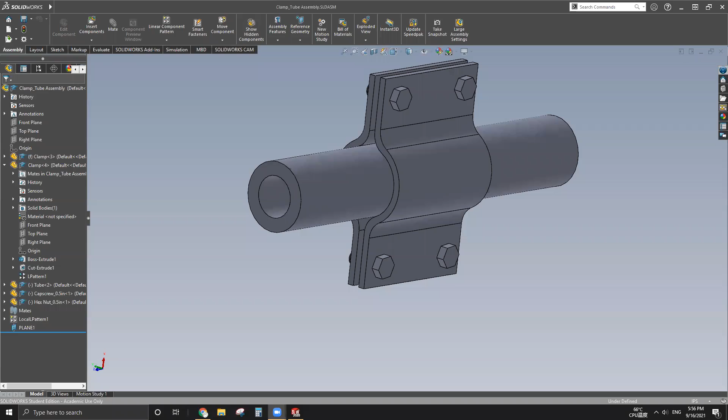Resume recording. So just jump three or four times, you can access this video. I strongly encourage you guys to watch this video and follow along, or just spend maybe 30 minutes before you go to bed and watch it. So that'll take you about 2 weeks. Then you have a pretty good idea and understanding of how to use this software.

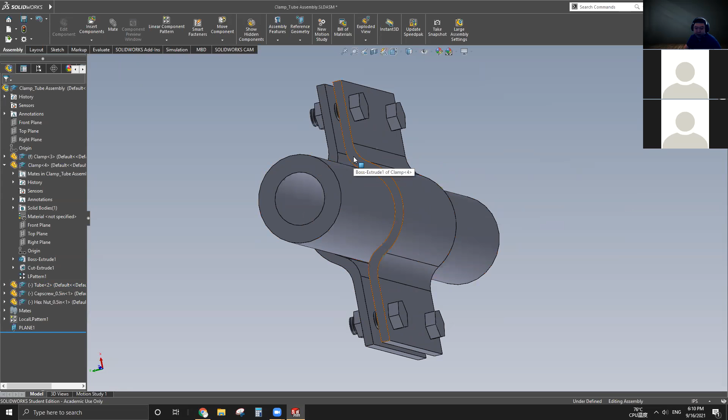All right. This is the assembly that I showed you guys last time. From week 1 to week 3, which is last week, we have been talking about parts. So pretty much we just talked about how to make a part, right? Very simple, straightforward, and that's why today I'm going to be introducing how to make an assembly. At least a simple assembly, not a very complicated top level assembly. So from here, you'll see how the parts are made, and different relationships will give you different effects. For now, this is rigid, right? But not fully rigid since it's a clamp. So it should be acting like a fixture that's clamping down on this pipe.

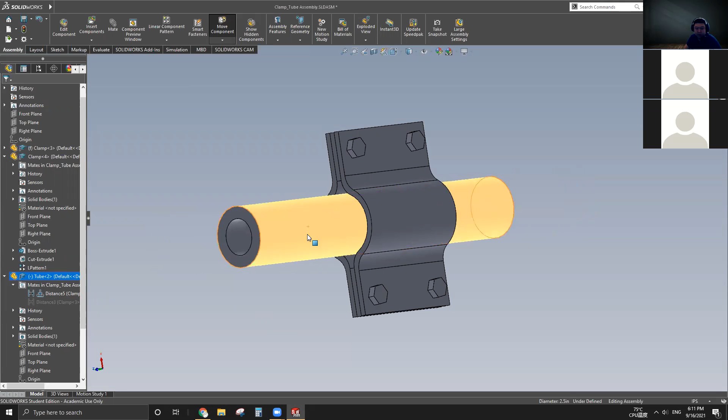So it's a little bit hard to see, but look at the edge of the pipe. If I move it, it rotates. So that's following the rule of physics, right? If you're not clamping down too hard, this totally can rotate within the groove and can be wobbling a little bit. And also, if we get rid of one of the relationships, this pipe can even be slipping. So sometimes when you build your model, it really depends how you set up the relationships, which right here we call mates, or constraints, that will give you different mobility or effect.

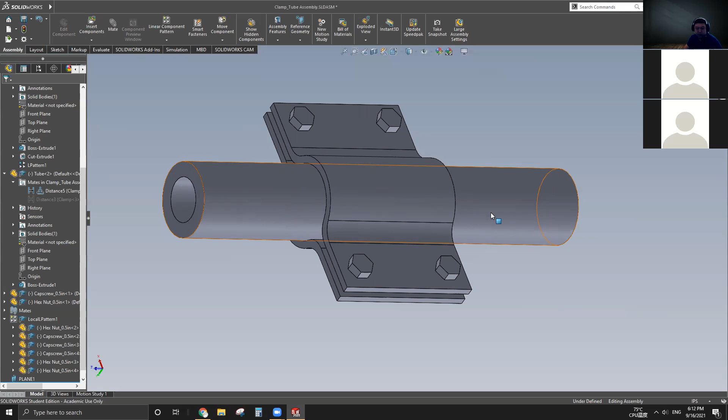And also these fasteners, in reality, can rotate, right? And they're totally able to be rotating. And since it bolts on with a nut, it cannot make any axial movement, as we modeled. So that means once you've done constructing the assembly, you can totally play with it and see what the limitation is and what the remaining room for designing is. Okay, any questions so far? If not, I'm gonna move to how to make this assembly.

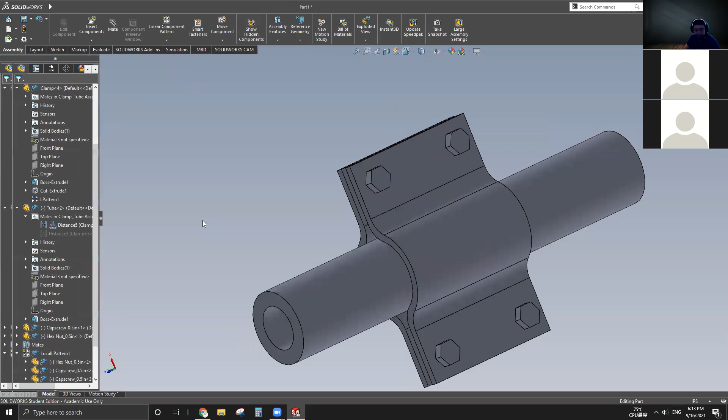All right, starting from scratch, we have nothing. And the first part I'm gonna make is the clamp. Before doing anything, I have set up two hotkeys, which I use many times on this computer. The first one is Normal To, because this is almost a must-have during sketching. And the second one, under Evaluate, is Measure. This is how you measure, get your dimension or distance from the other model to set up your current WIP part.

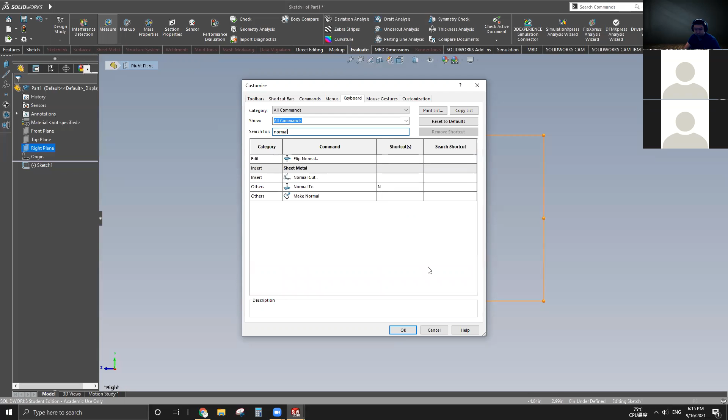So you can hover over, don't click anything, right click, and there's Customize. Just customize right here in the keyboard. You search for the feature or the function you like. So first thing is Measure. I set it to the number 1 on my keyboard, and the other is Normal To. I set it as N because N represents normal, right? So just FYI, you don't have to do this. To me, it just saves maybe 2 seconds of clicking multiple times.

All right, so pick a plane and let's make the clamp. If you don't know where to start or anything stops you, it's always good to make 2 center lines. Those are construction lines and will never hurt you, and you can get rid of them anytime.

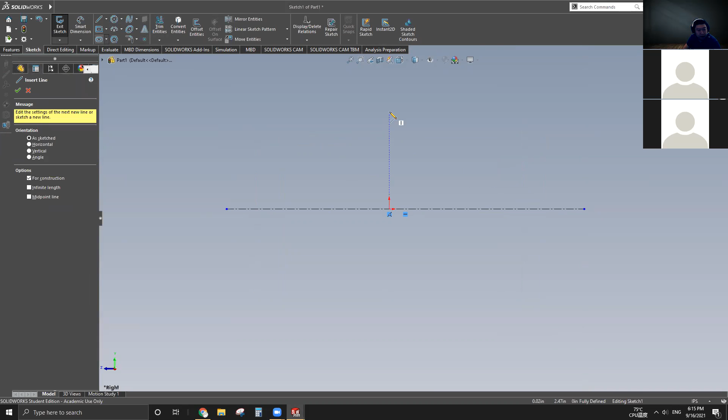So once we have 2 construction lines and a good coordinate system, a great question for this time: from the last 2 weeks, every part I started building always started from the origin. Is this part, the clamp, gonna start from the origin as well? Do you think that's gonna be a good idea? No. I think it would be a better idea to put the center of the part, or the center of the 2D projection of the part, at the origin. Right. Well, yes, no, maybe. It really depends. Psychologically, if it was totally yes, I wouldn't be asking, right? But it's okay. I want to bring out the logic or your personal preference of modeling.

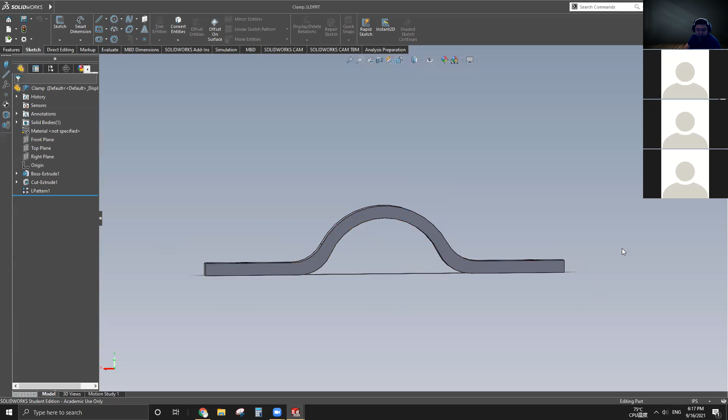So let's take a look at the assembly right here, and let's separate out the clamp by itself. If we're making a flat sheet first and somehow bend it, I'm not sure how well that will go. So starting from this side will definitely be harder than starting from this side, right? Because right now our tools are just revolve, extrude, and nothing else to add material. So once we have the profile from the side, we can draw it and just extrude it to form the entire shape. That'll be easier. From this side, you start drawing something and extrude it, and you need to think of how to make up the top part.

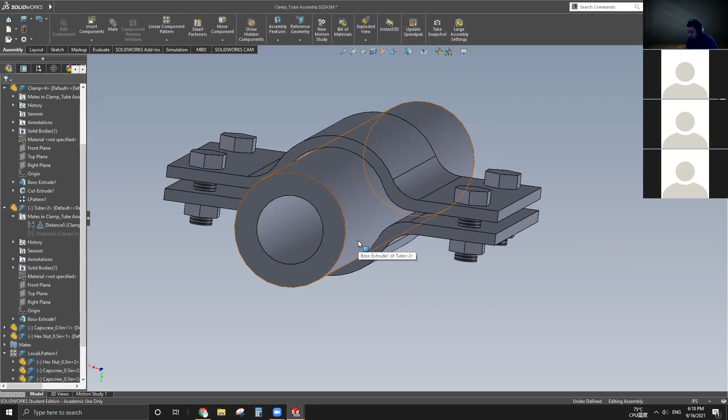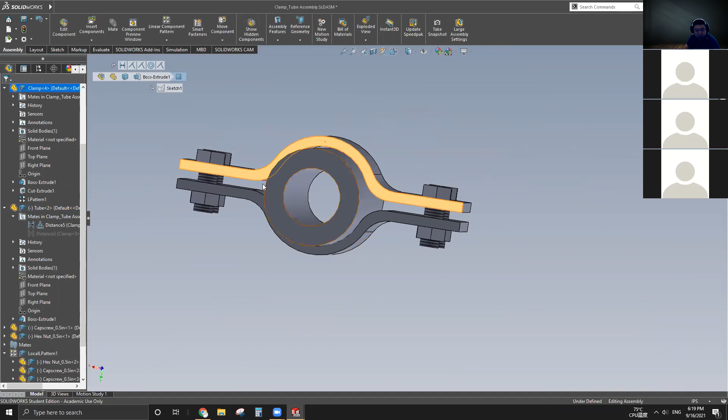So based on all those reasons, we know we'd better start from this view or this direction. And we have 2 clamps right here. It would be easier for us to start drawing the curvature by just drawing the pipe out on your new sketch, right? Because you can totally make this surface and that surface overlap. And this surface would just be an offset from this surface by whatever the thickness is. So that's why I'm saying it depends on your own logic and your modeling preference. You may not start modeling from the center.

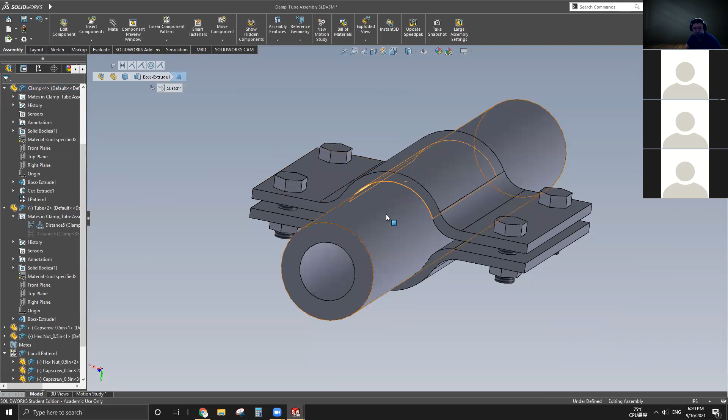So let's figure out what the outside diameter of the tube is. And right here it's 2.5. Let's do 2.5.

All right, so right now I have the pipe. Let's assume there's a pipe, and this outside diameter is the outside diameter of the pipe, which I'm gonna set as the inside diameter of the clamp. So from here, let's just imagine,

let me bring the rectangle tool, the center rectangle. We have one clamp right here, and we have another clamp right here. Well, I didn't make them perfectly identical, but just for you to visualize, and another semicircle or quarter circle on the top to give the thickness of the clamp, and also at the bottom.

So now we have the entire model's profile, and we just need to get rid of something that we don't want and define the remaining things that we do want. Then we can extrude from there. Okay.

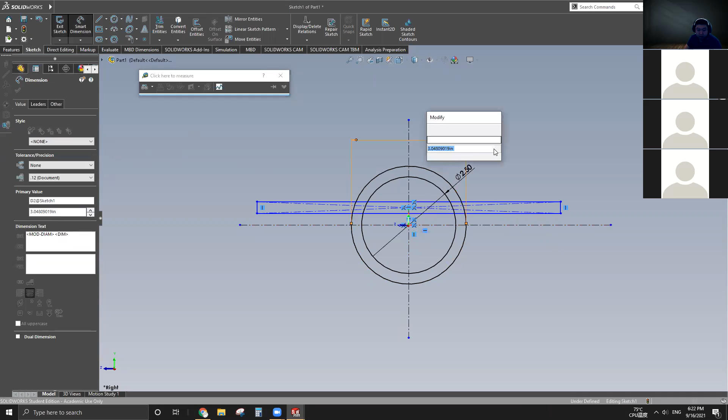So first thing, anything from bottom is what I don't want. And I need to somehow form the top feature, which has the thickness. And let's get the thickness, which is 0.25. And also set up the thickness from this side.

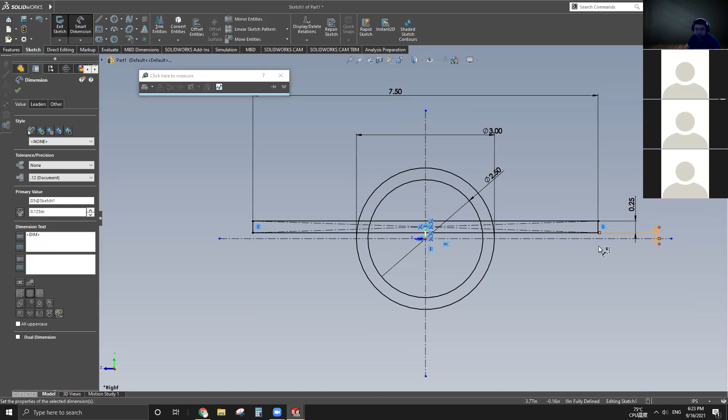And let's get the overall length. 7.5, and how far apart these two clamps should be is another quarter. So we can either calculate this number out, or we just measure it from this model since we have a reference model. And from here to here would be 0.25 divided by 2, since the center line is not the surface of the other clamp.

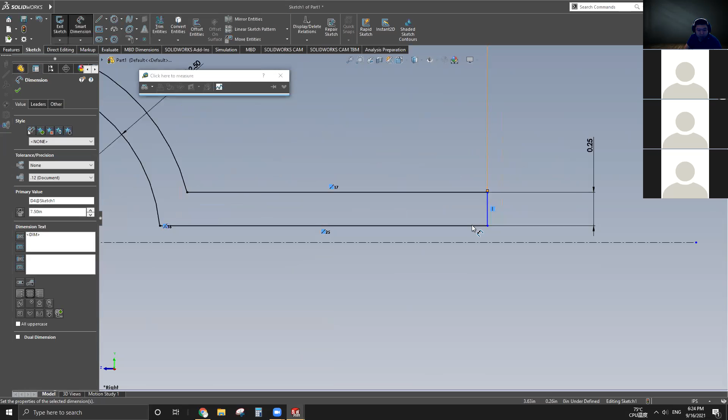So for now, we do have the shape or the geometry of the profile of the clamp that we want to extrude with. And we have also a bunch of extra lines. So now trim entity and just start trimming. Okay. Okay, we have added the dimensions that we wanted to represent.

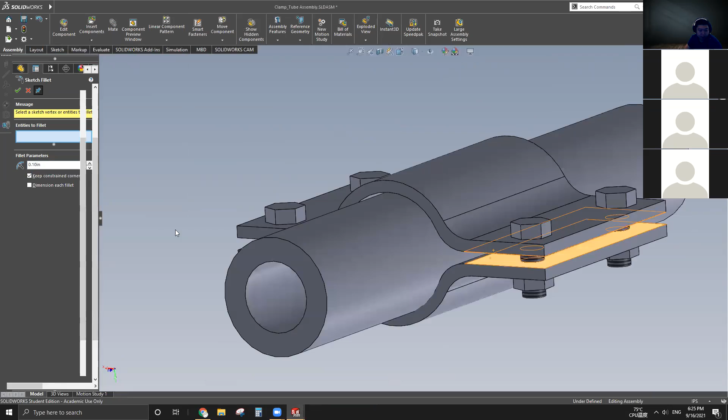All right, and let's go sketch the fillet. Since we don't want this sharp edge right here and this aggressive turn, we want to make it smoother. And let's add the sketch fillet from here. And before that, we need to measure what the fillet is. So the fillet radius is 0.71. And the first one, 0.71. We can do all four all at once.

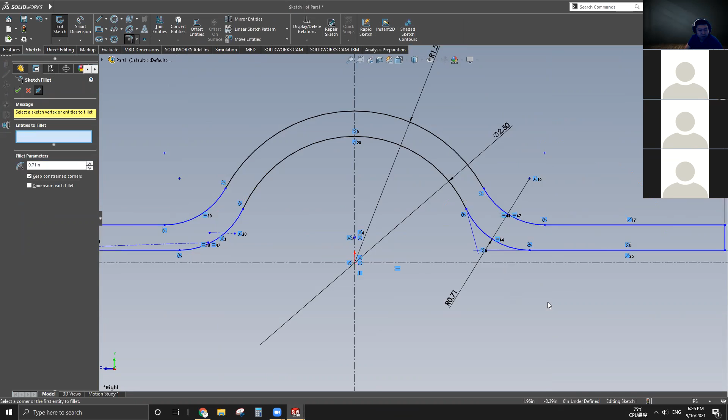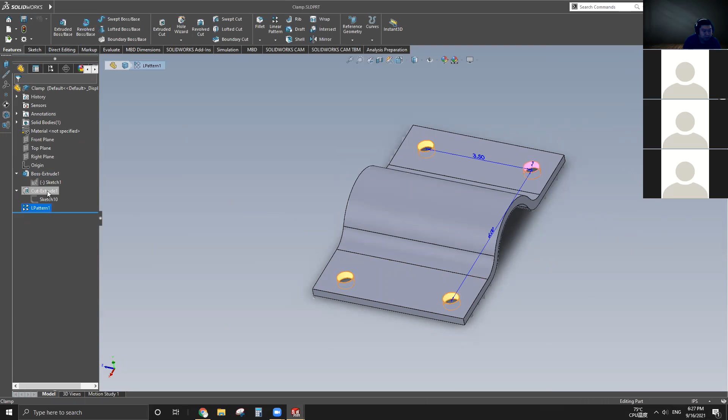So now we have the geometry of the profile and we can extrude it. And let's do overall width of 5, or length. And we have an identical clamp from the original assembly. And now we need to know what are the holes. So these holes are 1/2 inch holes and 3/4 from either side of the edge.

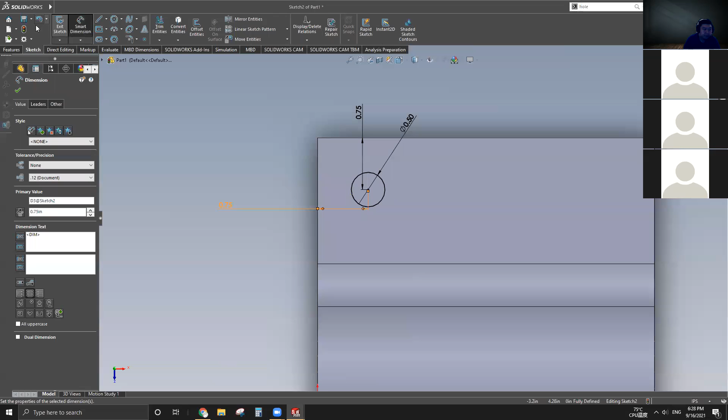So we can sketch, start on either there or here or from the bottom, up to you. So anywhere, draw a circle and set the circle to be 1/2 inch in diameter. And 3/4 from each edge. And after that, we can apply extrude cut. And from here, either through all or up to next, they both work. And click OK. We have the first hole made.

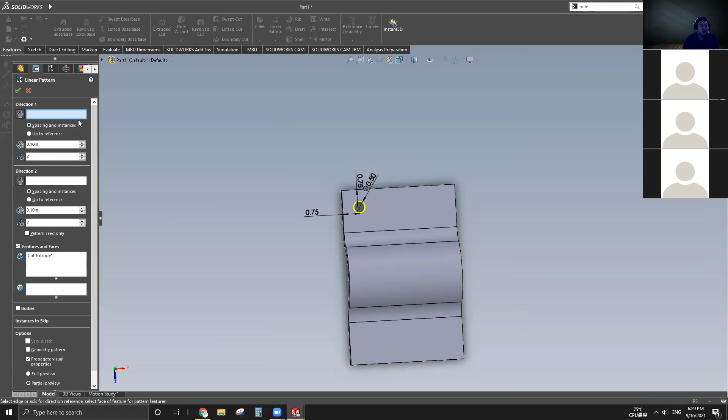And to form the other 3 holes, you can repeat this 4 times total, or you can use linear pattern. Either way, they're right. Just some are time consuming and gonna eat up a lot of your RAM. So under the linear pattern, there are 2 sections, direction 1, direction 2, and features and faces and all that. Those are fixed settings. The only part you need to operate is direction 1, direction 2.

So choose direction 1 as this edge, since this edge is in the x direction, and we want another hole to form in the x direction, right? And the other direction we want it to form right here, so it's going to be z direction, which we will be choosing either this edge or that edge, any edge in the z direction as our direction reference.

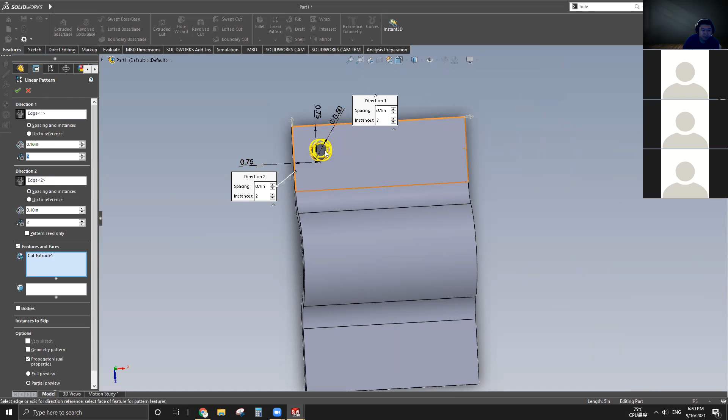So done with two directions, we need to set up how many holes we want in total. So we want 2 holes in this direction. The first hole is the original one, and the second one is the copy. And same thing in this direction, right? 1, 2, 1, 2. So it's 2 and 2. So 2 times 2 gives a total of 4 holes.

And how far apart? The spacing. We know 3/4 from the edge, and the total overall length is 5. So the center distance from this hole to the new hole will be 5 minus 2 times 0.75. So it's going to be 3.5, right? So 5 minus 0.75 minus 0.75.

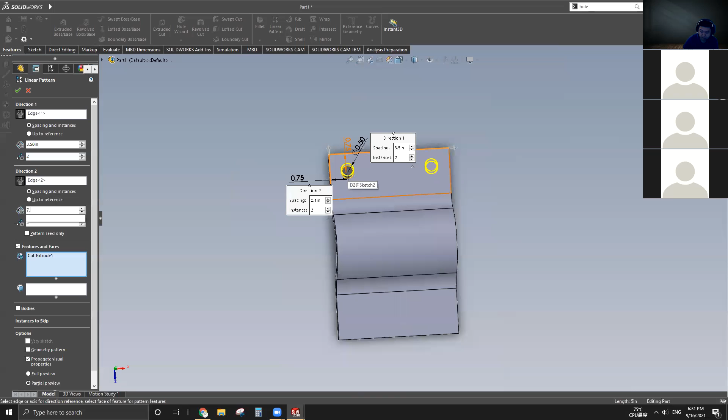And same theory for the second set. The only difference is the overall length is 7.5. 7.5 minus 0.75 minus 0.75. And it doesn't show up here. Where does it go? Let's zoom out.

These 2 holes showed up right here, which means we have the opposite direction, and that's when this little arrow comes in. So we click that, and it's going to reverse direction, and we have the previews on this side. So click OK. And here we have 1 clamp.

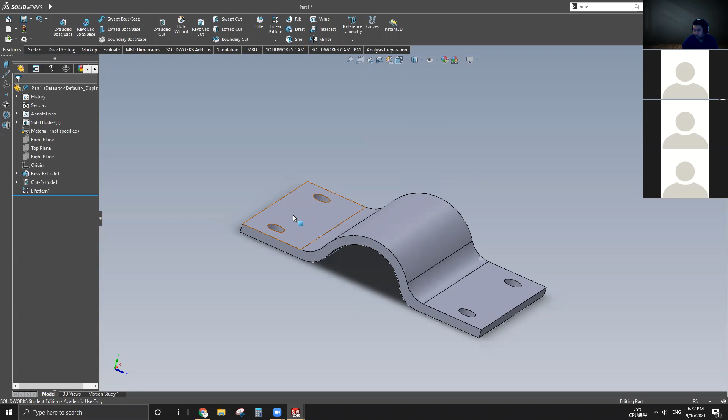And quick question for you guys. Do I need to make another clamp just like this? Anybody? Yeah, right. We don't need to make another one. We can just keep using this one and keep the same part number. And let's save it now. So let's save it to

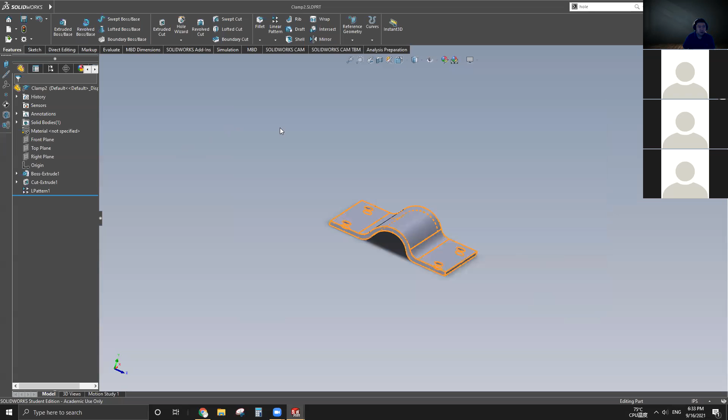I call it clamp 2 because it was called clamp 1 on Tuesday. So I saved it in a folder, and make sure all the parts which belong to the same assembly are saved in the same folder. That would be a good habit, because every single time you open up SolidWorks from scratch and try to load up a model or assembly, it tends to go to the previous directory.

And if not all the components are in the same folder, it might have trouble finding them. It'll tell you these parts are missing, and ask you to navigate to the location of those parts. And if you forgot it, that would be a huge problem. So make sure to save all your parts for the same assembly in one folder. For different assemblies, it doesn't matter. So once we have 2 clamps, the next part is the bolt.

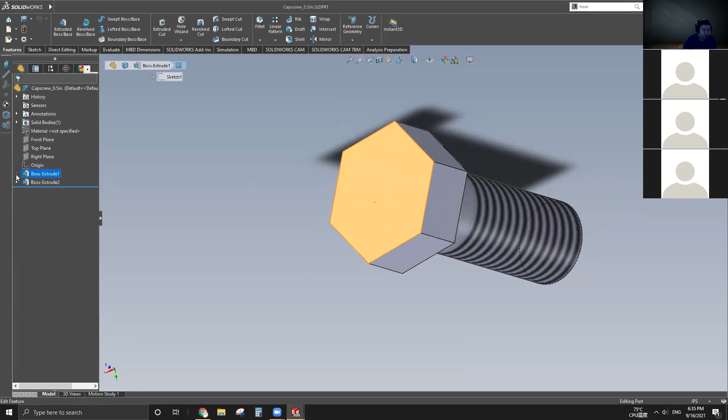All right. As I mentioned before, normally we never model fasteners, because either we get them from the SolidWorks design library down there, the toolbox, which gives you ANSI, ASTM, all different grades of fasteners, or we just download them from the supplier's website if it's customized. So don't worry about the fasteners. Today we're just gonna model it for fun, to bolt on the two clamps. It is not gonna be used even along your career.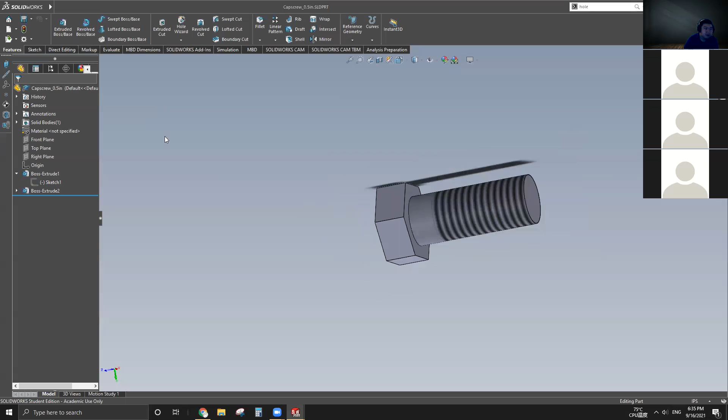0.74 on this hex cap screw is the distance from flat to flat. Normally the SAE specs will give you two values, one from flat to flat, one from hex to hex, and also the thickness of this. The overall length will be a variable, depending on what suffix or part number you choose. And the thread length is also a variable, depending on which one you're buying. So in this case, this is totally made up. Don't count on that as a legit screw.

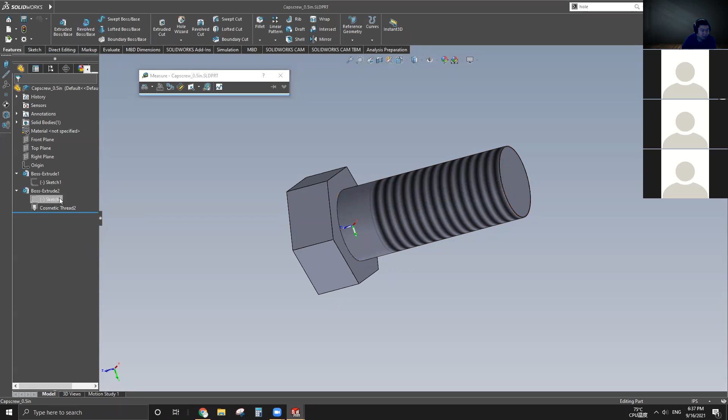And grade 8 looks like this. You must have seen this somewhere, with all those leader lines on the top of the cap. All right. So let's get some basic measurements so we can model this very easily. 1/4 length. And this is a cosmetic thread. And the length is 1 inch.

So same deal, any plane, and there's already a hex shape polygon waiting for you. Just click on that, and we have a hex shape, and just dimension it as 0.74 or 0.71. 0.74, right? All right, and let's extrude it to a fairly random thickness. And now let's make the screw body.

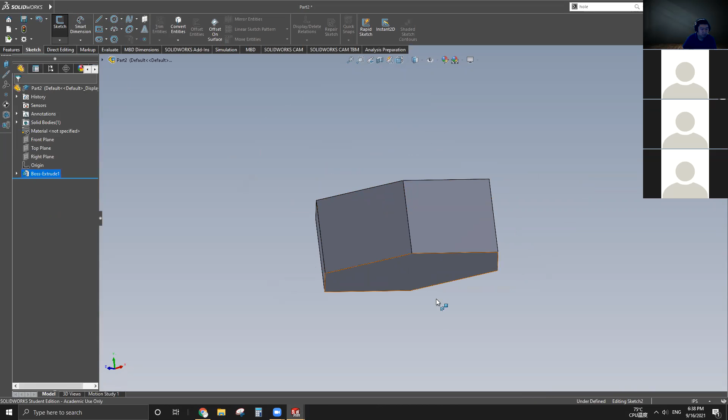Since our hole is 0.5, I'm just going to use the same value for the screw body, even though we should never do that, because in industry the hole is always bigger than the screw. The nominal size of the hole normally should be 1/8 or maybe 1/4 bigger, depending on how tight the tolerance is on the positioning of these holes. But in this case I'm just lazy.

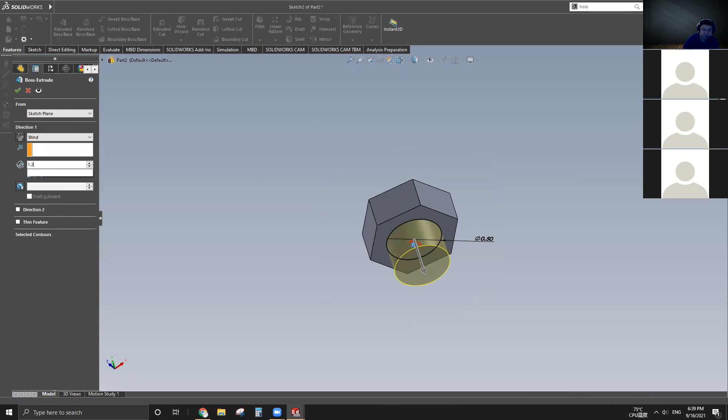Everything happening in SolidWorks is perfect; in reality it's not. So let's just make it 1/2 inch and extrude that for 1.25. And here we have a fairly simple screw with 1.25 length. And now let's add some cosmetic thread.

Even though this is not a legit thread, it's helpful to have it so that we know where the threads are, and when we install it, whether we're using full engagement and the thread length is long enough, and such. But it doesn't really have any essential meaning. It's just cosmetic, kind of like a layer on the screw body. So you just type in cosmetic thread, and the first one is right there.

If it's dimmed out, like if you search something and it cannot be applied, then you must be either in another process, like sketching, or in another feature setting, kind of like where I'm at right now, or the part cannot be applied with such a setting.

So first thing, thread setting. The thread setting is to select a circular model edge, and this is our edge right here. And starting from a face or a plane, which is the bottom. And standard, normally use ANSI or ISO, depends on you. But in this case, let's get rid of it first, and I'll come back.

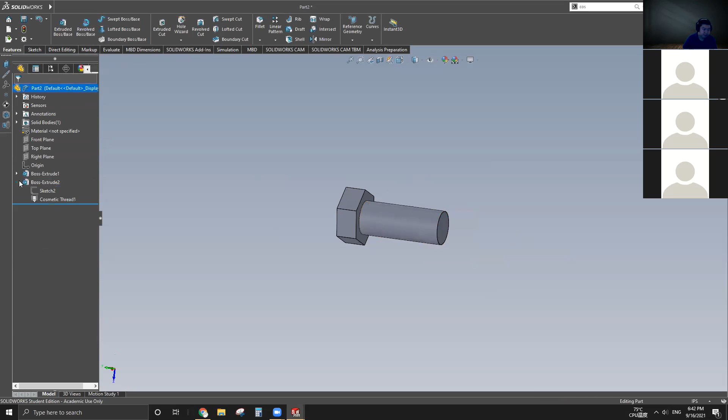And since the thread is not going all the way to the top, we're going to go blind and make it 1 inch. If it's going all along the screw body, you can go up to next or through. And it's not showing up, right? We can see a cosmetic thread is created right here. You can see the highlighted line, this orange line. So it's created, but it's not displaying.

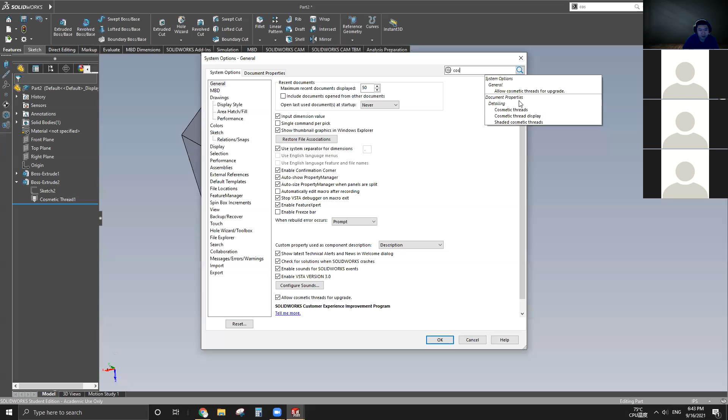It's because sometimes SolidWorks will have the setting to omit some cosmetic features, so that saves your time when you open up the model, and also it won't make your model look so messy. So you search here, cosmetic, and the first one, allow cosmetic thread, no, not this one. Right here is document properties, detailing, cosmetic thread. And right here you can see what's showing and what's not. If we click display all types, it'll show up.

And also here there's a bunch of different categorized stuff. And here is top level annotation. Pretty much, if you show this, it shows everything within this model. But if you uncheck it, you're not able to see the cosmetic thread. So let's go back to the thread. So this is what we manually set, right?

And if we go with the standard, it will ask you if it's machine thread or NPS and the thread size. So this is the real stuff that industry uses. Sometimes a standardized screw doesn't even have the actual thread on it, because if you use hundreds or thousands of those, that's hundreds or thousands of extra features to load. So some models don't have it, unless it's NPT or something. Then they need a thread callout on the machine drawing to indicate what kind of thread is used, so machinists know how to make it right.

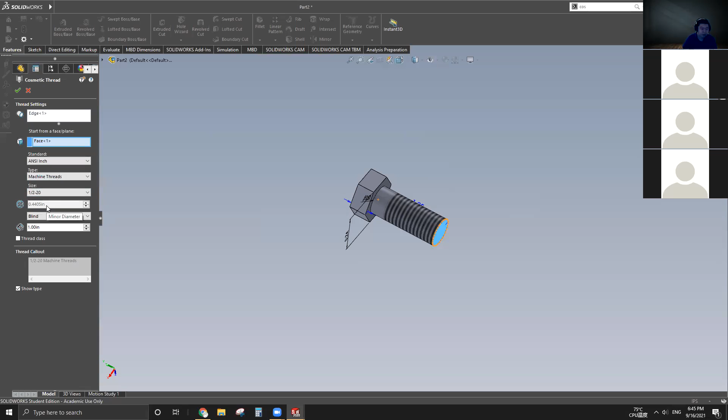So once you add that, notice you don't have to choose your diameter again, and you will have this callout: 1/2-20 machine threads. So on your machine drawing, when you bring up all the annotations, this will show up to say there is a thread, for how long, and with the spec.

Because guess what? With the cosmetic thread right here, it looks like this bolt has threads, but in your machine drawing, it just looks like a hex cap and a cylinder. That's it. There's no actual shape of the thread, and of course you're not able to see the cosmetic thread in your drawing.

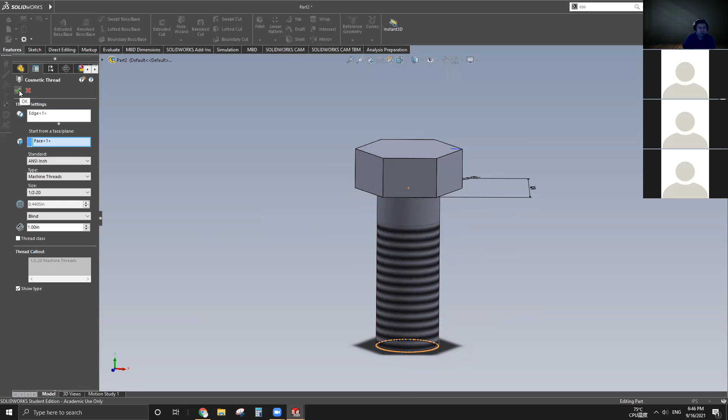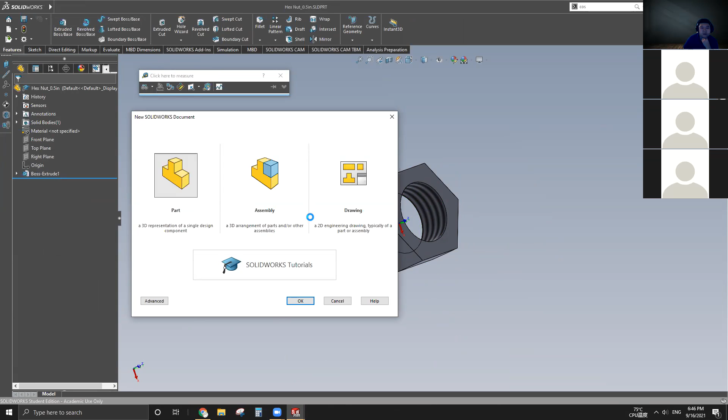So we have our screw, and let's work on the nut. The nut will be easy since it's just a hex cap with a hole and nearly the same dimensions. So the same steps as making the hex cap screw.

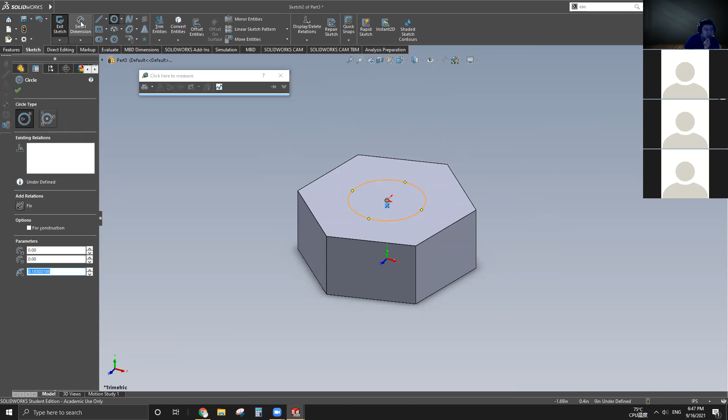And start making the through hole in the center. And again, we're gonna make this 0.5, even though it shouldn't be. And from here, we select through hole. This is gonna be indeed a through hole. And now we have a nut without cosmetic thread.

So same thing, thread setting. A little bit different this time is we're making a female cosmetic thread. On the screw is a male thread, and here is a female. So you need to select an inner edge instead of an external edge. And the starting plane or face is just either side. And we can select this.

Yeah, the option of the 1/2"-20 is gone since this hole is already 0.5. If we made this like 0.44, it's supposed to be there. So in this case we just manually do it. And diameter would be the opposite. For the male thread, it should be less than the diameter of the screw body. But for the female thread, it should be a little bit greater than the hole diameter.

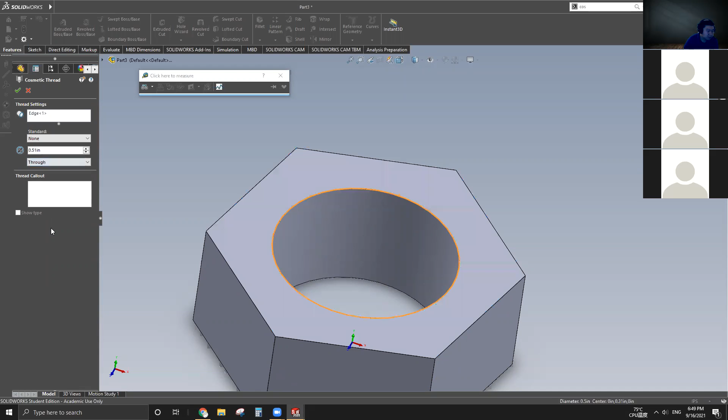And also here, we don't do blind anymore. We do through, since it's gonna go through the entire internal length of the hex nut. And it's still not showing up. Either go with the option, search cosmetic thread here, turn on the setting, or okay.

Okay. Any questions so far? You guys been really quiet today? Okay. So I'm assuming this is very easy stuff then. Everybody can just follow the recording and do one of the assemblies themselves.

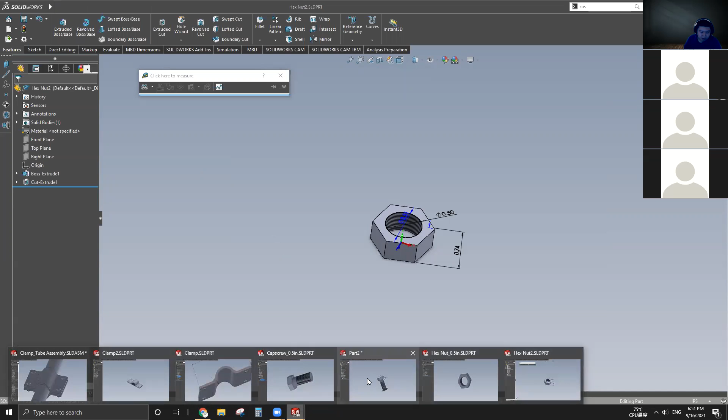All right, let's save it as hex nut. And save this one to be cap screw.

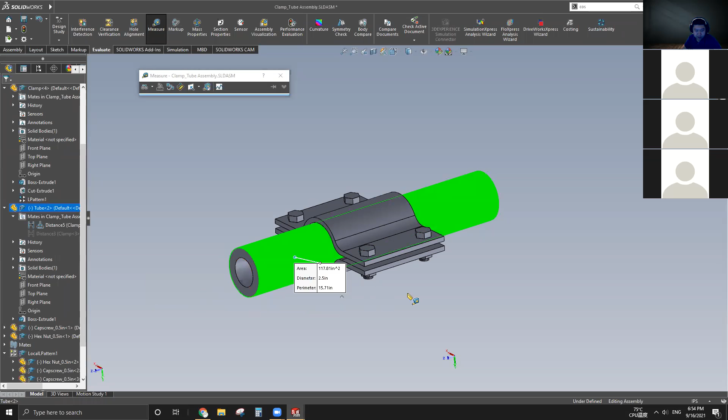So if we are using a 2 inch size schedule 40 in our assembly, then we're supposed to model the pipe per this value. But again, same theory as when we modeled the screw. This is just for a demonstration. So I can make up the pipe dimensions. And let's do this. So the inner diameter is 1.5 and outer diameter is 2.5, and overall length, I believe, was 10, 15. Okay.

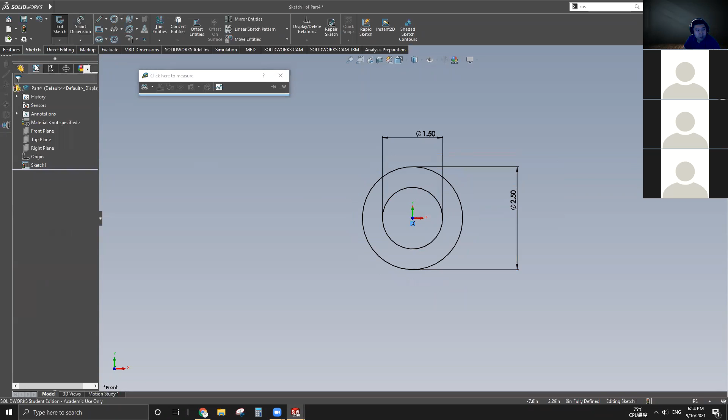All right. Let's make a sketch, and pretty much just make 2 concentric circles, and make extrude. Okay, so right now I have a straight section of a pipe. If you want to make this curved, instead of extrude, just use sweep. Let's save it.

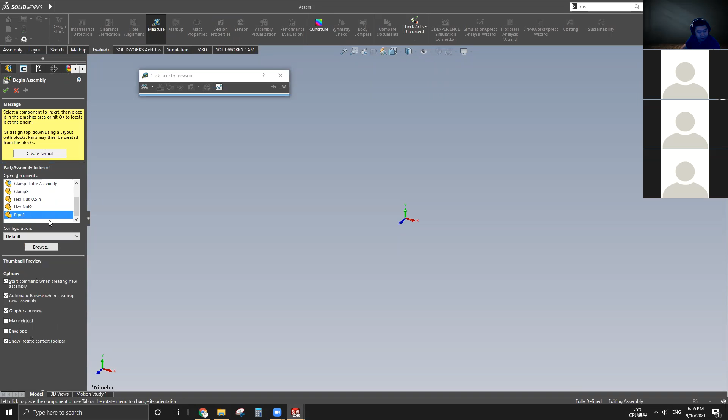You can either select parts from the left, for example, I select this pipe 2, and when I hover it over, like it's right here, I just need to click one more time and it will stay here. Or I can bring it out of my folder and just drag parts here. So either way is good.

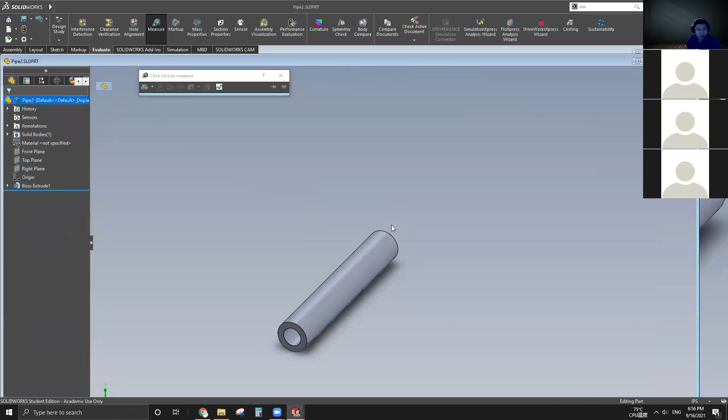Or if I have multiple windows, I can even cancel the maximize, and, wow, it's really laggy. I can even drag it from here. So many ways, kind of like dragging a file to upload, it will be up to you. Just make sure you find your most comfortable way to do it.

So in this case, we need the pipe, and we have the pipe here, and we have the clamp, and we need another clamp, and we need 1 screw and 1 hex. But for now, I even want to remove the pipe. Just leave 2 clamps. I want to make these 2 clamps first, and then implement the pipe, and finally add on the fasteners.

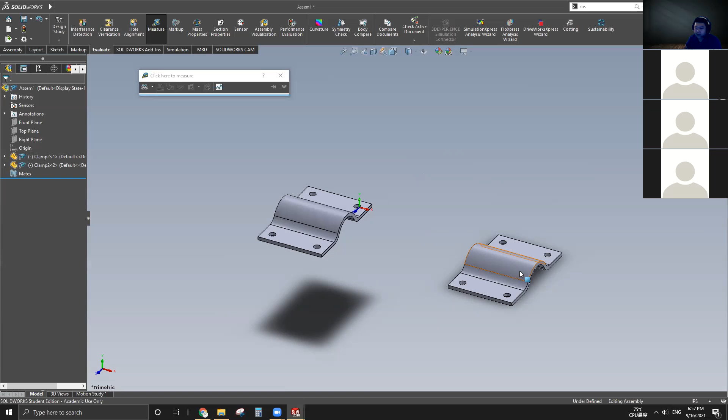So again, this is my personal assembly preference, and you can totally do yours, whichever way is easier, but I just believe this is the most efficient way to do it. So under the assembly tab, the first one is edit component, but I really don't recommend you edit any component within the assembly interface. You can see this is assembly, and when you go over to a part, it will tell you it is a part file, not an assembly file.

So I really don't encourage you guys to make any part changes at the assembly level until you have to, or until you are really experienced with it. Because sometimes those features will crash your model and it won't read the model correctly. And especially if you swap any part with some modifications at the top level, that's not gonna be fun. Until you're really good at it, don't do it.

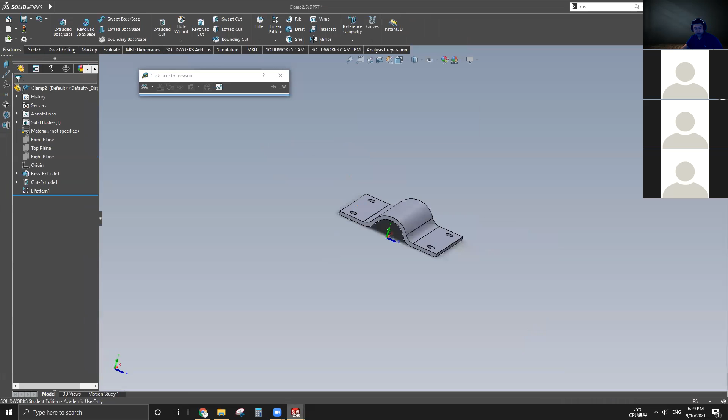So if you want to make any change to the clamp, click on it, open it up, that navigates you to the part file, and you make the change in here and save it, and Control Q, which is rebuild, and go back to the assembly. It will automatically reflect the change. Okay.

All right, and then insert component brings up the page. At the very beginning, you can start dragging parts here. And the mate, which is the soul of the assembly, we're gonna use over and over again. And the component preview window, I personally never used it. And the patterns, smart fasteners and move components, all of this stuff you can pretty much find with right click, so they're used a limited number of times. The OD of the pipe is 2.5, ID is 1.5.

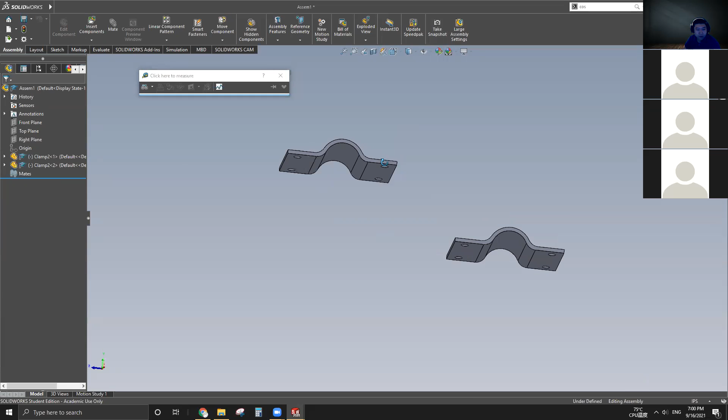So we have two clamps and let's just mate them together the way we want them to. So we know the two clamps are 1/4 inch apart from one flat surface to the other flat surface. So let's do that first. Click on one surface and click on another surface. You can see they're automatically applied as coincident because SolidWorks is smart enough to try to predict what you're trying to achieve.

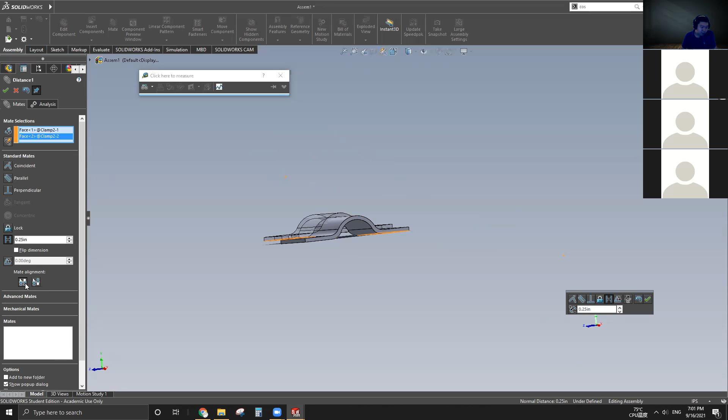And in this case apparently it's wrong. We want distance because they're 0.25 apart. And right now they're 0.25 apart, but they look kind of weird, right? So I want this clamp to rotate 180 degrees. So one concave up, one concave down. So here is mate alignment. You click on there, and it turns the opposite of the direction that you originally set.

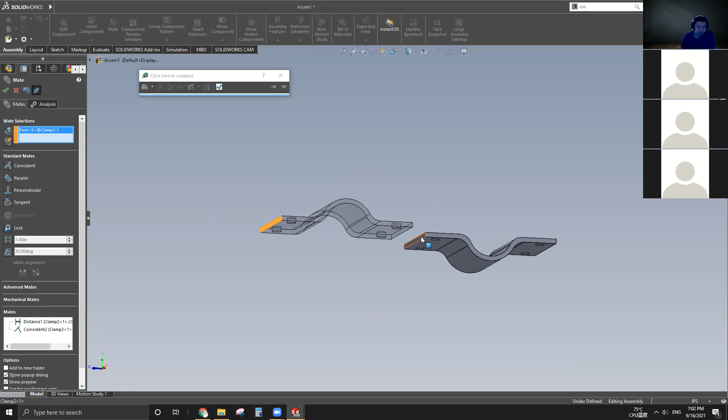And now they do fall into the direction I wanted, and I just need to keep adding more mates or constraints to make it look like it's clamping on a pipe. So this time I'm gonna select this surface and that surface. And coincident works well in this case. Now click OK. And this side and this side. And click OK.

So let's get out of the mates and we can see our mates under the individual component or individual part. This is an assembly tree, different than in the part file. That's your feature tree, right? So here the sub tree is your feature tree. So mates are right here, and you can click or just hover over. It'll tell you the reference surfaces that this mate involves.

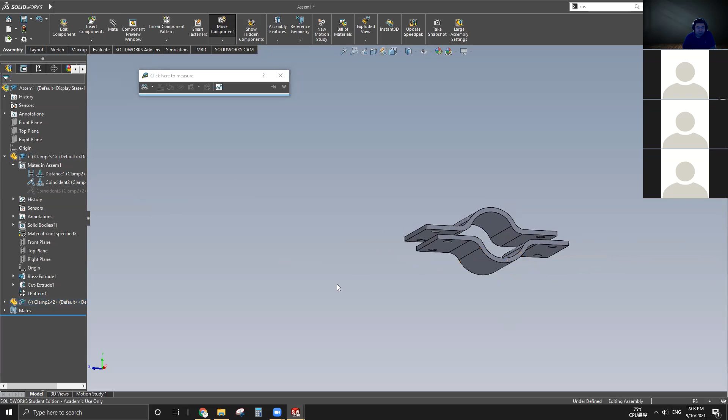And there are so many different ways to mate it to achieve this position. For example, we can suppress that one first, and you can see these two clamps are no longer constrained in this direction. So this time we can mate something else. Like we can mate the two through holes together as concentric. And it does the same thing.

All right, so let's get rid of this. Like I said before, the hole is supposed to be bigger and it depends on the tolerance of the positioning of these holes. It may not necessarily even be here. And using holes as references is sometimes not the best idea. So, after that, let's bring in our pipe.

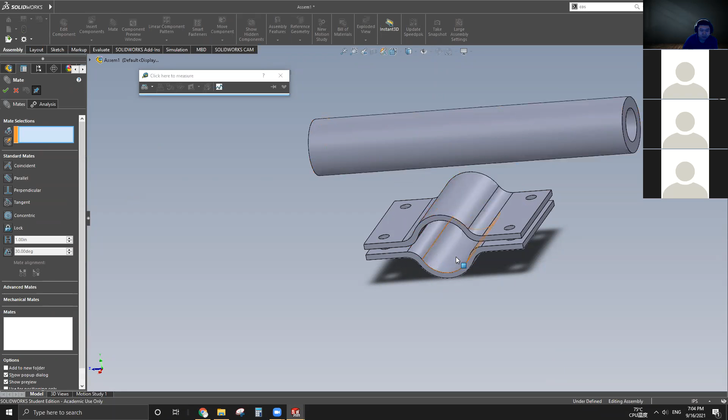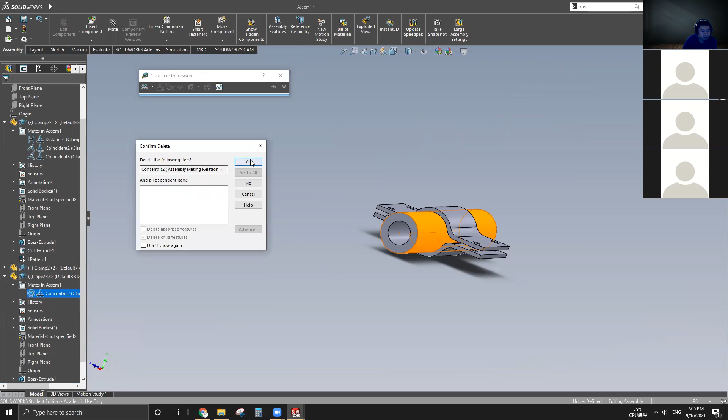And also there are multiple ways to do it. Since we just made the ID of the clamp the same as the OD of the tube, the OD of the pipe, we can totally make them concentric. Okay, so you can see this pipe is slipping in between the two clamps. Normally, the best practice for mating concentric objects is creating axes.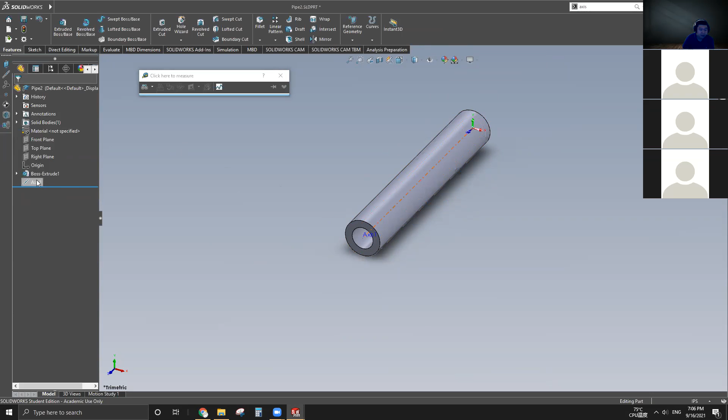So now I'm gonna make a change. In this pipe, I don't have any axes, right? I didn't create any, and there's no default. So I search axis, or there's axis on my left right here. It asks me for a selection, and I want to make an axis along the pipe direction. So I just choose any circular surface, and it's gonna give me the axial axis, and I call it axis 1. And now we save it, Control S, Control Q, and go back to our assembly.

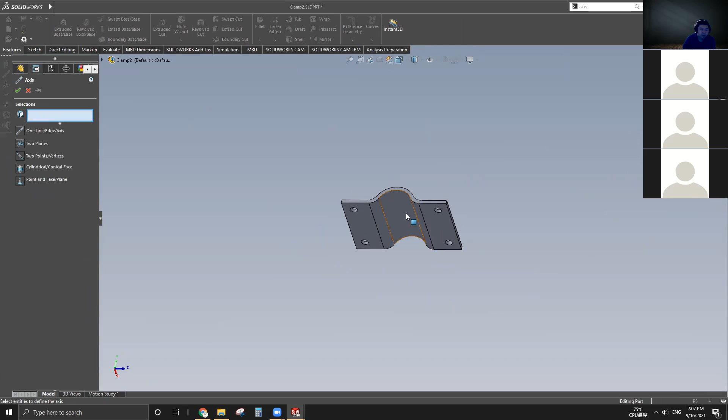Model contained within assembly has changed. Would you like to rebuild the model assembly now? So pretty much it's asking, do you want to rebuild now? Yes. So from here, you see axis 1 is here. This is what I just constructed. And once we have the axis, there's nothing to mate with yet. So we're gonna go back to the clamp and also make an axis of this circular area. And same, Control S, Control Q, go back to assembly.

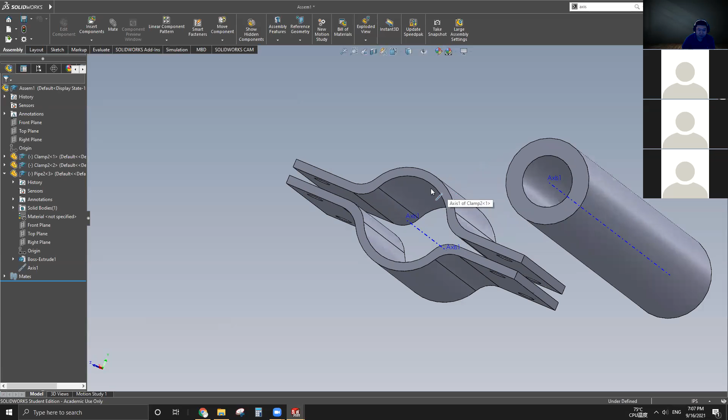Now we have two axes. Once we made these two axes, it gives us the same goal of mating the outer surface of the pipe to the inner surface of the clamp. But actually, we are making this pipe truly concentric to these two clamps. Maybe I described it in not a very good way, but I hope you guys get what I'm saying.

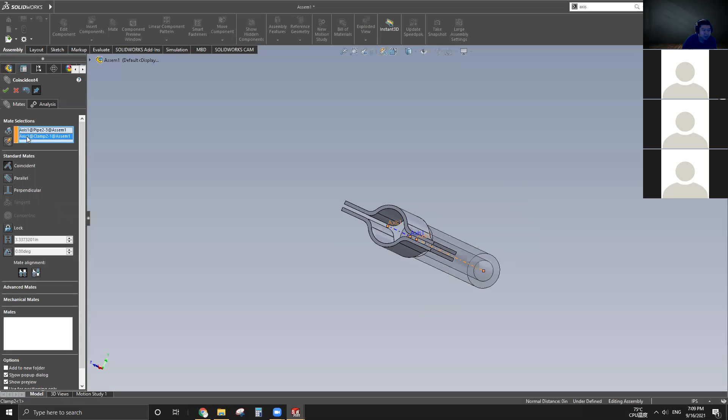So normally when you have a concentric part to another concentric part, I will try to make the two parts concentric just from axis to axis, plane to plane. That will be the best practice, very clean. And later on, when we make any changes to the clamp, your overall assembly will not be affected. So you can mate this axis to that axis. And this time I'm not using concentric anymore, since those are just two three-dimensional lines and they are coincident, and click OK.

And also here to here, we can use the distance. This distance could be very arbitrary, depending on which section of the pipe you want these two clamps to be clamped on. So you can play with the number, or you just simply don't put anything and let it slip the entire time. At the assembly level, things being under defined is quite common, because we need to keep adjusting our assembly to accommodate new design changes, right? So sometimes we leave stuff floating; we just constrain them in one or two directions and leave one or two degrees of freedom that work best for us. So it's still up to you.

I had a quick question. Yes, go ahead. So I understand that you told us to use the axial constraint instead of mating the surfaces together, but with the axial constraint, is there any way to make sure that the pipe doesn't move out of the clamp? I know we could just leave it within the clamp, but I was wondering because if you mated the surfaces, the part wouldn't be able to leave the clamp. What do you mean by out of the clamp? Like if you move the pipe, you can pull it outside of the clamp along the axis. Is there any way to prevent that from happening?

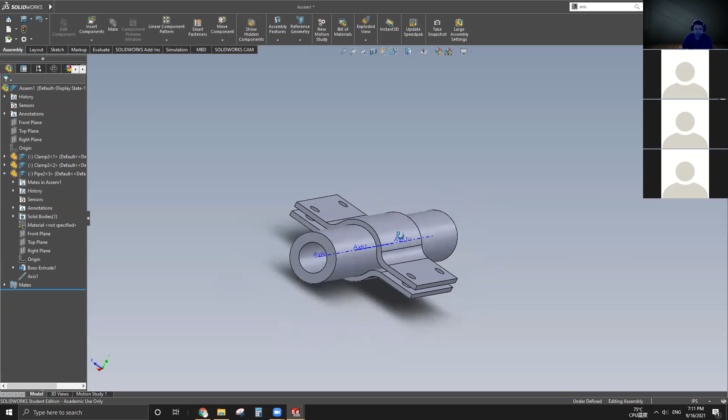Once you set up the two axes coincident to each other, this pipe can only do axial movement, so it would never interfere with the clamp body. No, I get that, but this is more of a trivial question: is there a way to prevent the pipe from slipping out of the clamp? Oh, yeah, that's why we set up the second mate. But if you want it to still move freely and not fall out of the clamp area, maybe, but I don't know at this moment. Okay, thank you. No problem. Because it's pretty much never concerned me. Normally, if we want this to move freely as slipping... well, let me think about it.

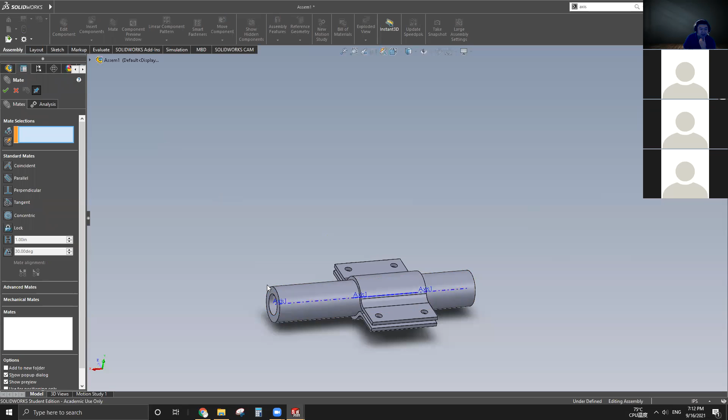Yeah, right. No, there is no such thing from my knowledge to set up like a boundary condition or something like that, like, oh, this is how you can only move 5 inches or only 10 inches. I've never done that. Yeah, but probably there is a way. I can do some search and let you know next time.

Thank you so much. Yeah, no problem. That's a great question though.

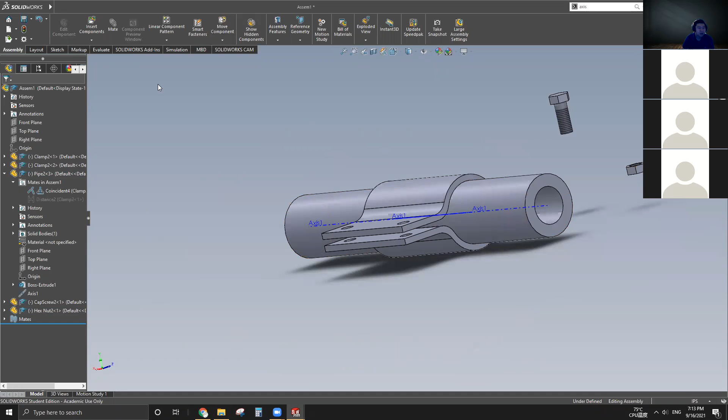Okay. So once we have the pipe, we just need to install the fasteners, so the screw and the hex nut. We can drag multiple subjects at the same time. And this will be easy because the bolt is just going to bottom out at this hole and go through that hole, and this is just going to be attaching on the screw body and also the bottom surface of the clamp. So first thing, let's do the screw body to the hole.

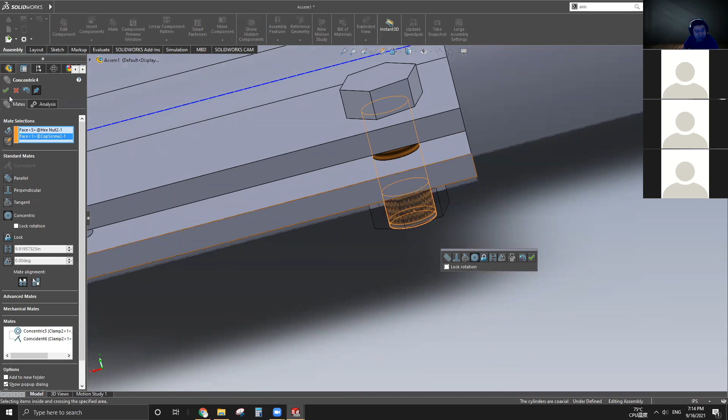And this time, we don't need to do any axial mating since it's a fastener. So a lot of exceptions on fasteners because those are not that important. Well, they are important with respect to the bill of materials, but in our modeling, since they are the least likely thing to be changed, they're not that important. So one example for you to realize that is a lot of industries run FEA analysis on their machinery.

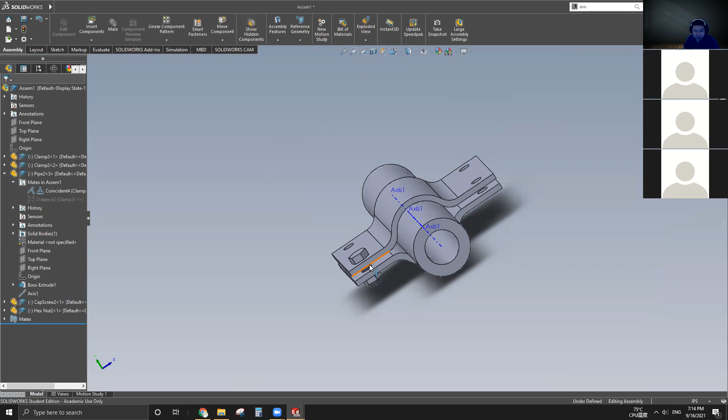And before doing that, guess what? If you have any interference from the pipe body to the clamp, that results in error. Because pretty much the FEA software like ANSYS or Nastran won't understand that we have overlapped the material. However, the fasteners will most likely be removed from every FEA because they are technically not going to be counted into the structural integrity, and those ratings will just be applied to how strongly they're bonding together.

So the modeling of the fastener sometimes can be a little bit loose, but when you deal with essential parts, you need to know the difference, like when you need to pay extra attention and when you can save your time. So these two parts are mated.

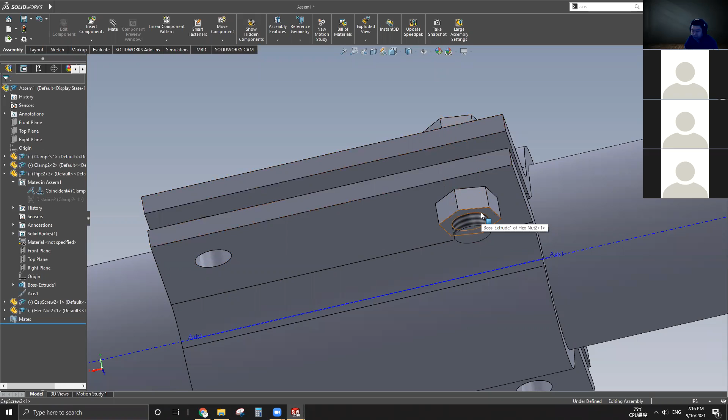One more thing is on Tuesday, since I didn't grab the exact dimension, the screw was a little bit short. It falls under the nut. So it will never be a good design. We always want to leave a little bit of clearance or a little bit extra of the bolt. At the same time, you need to ensure the full engagement of the thread length with the nut. And also, as a rule of thumb, leave maybe 1/8 extra extruding out of the nut.

And the next is to apply the linear pattern. So same thing as we applied the linear pattern to make those holes. Components to pattern, where we pre-select both, and direction 1 is still going to be the same. And direction 2 will also be the same. And sometimes you don't need to do direction 1, direction 2. You can do reference feature and just reference a hole, but that will be for later. Right now, just do both directions, all right?

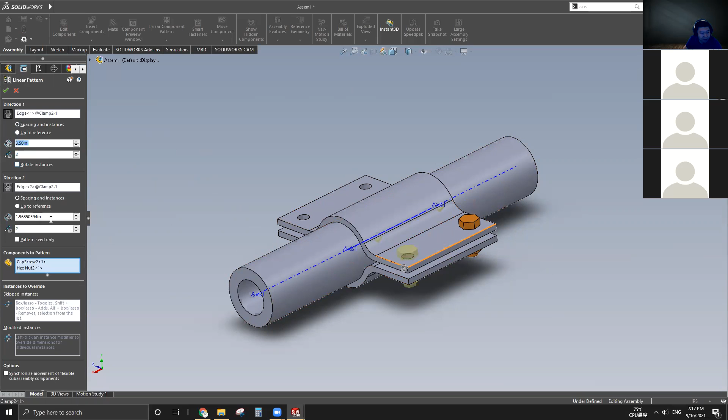So 2 in each direction, and you can see the preview. One of the directions is wrong. And now we need to give the spacing, which is 3.5 for one and 6 for the other. And from the preview, it looks okay. Click OK. Then we have this assembly. Any questions?